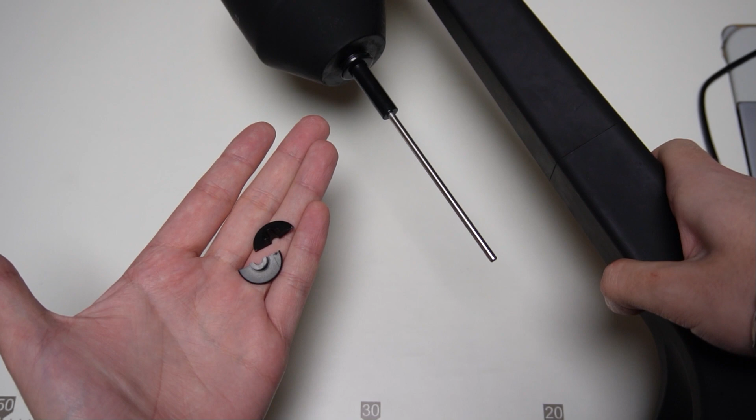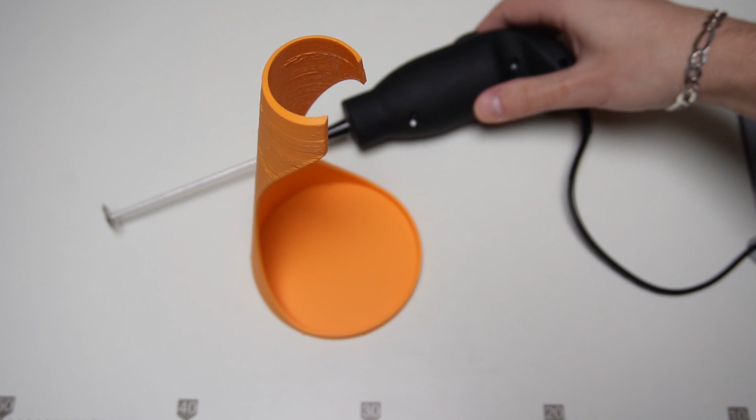The beater of my coffee mixer broke in half, so until I found the right filament to fix it, I bought a handheld electric one. But it needs a stand. I don't like the fact that it doesn't have a stand and I have to leave it on the table, so today I will show you how I designed this one in FreeCAD. I think it looks pretty good, or at least it gets the job done.

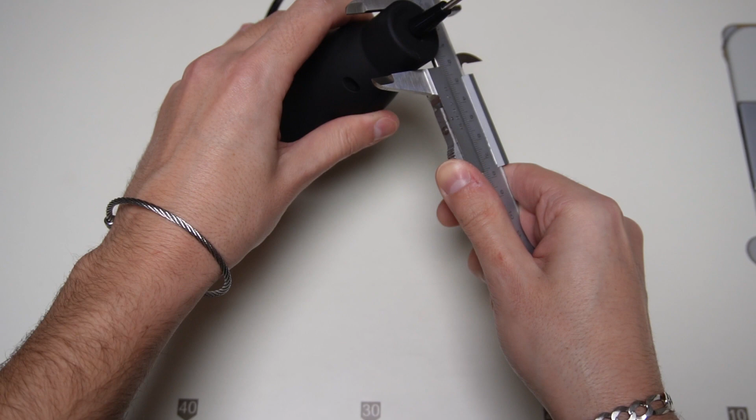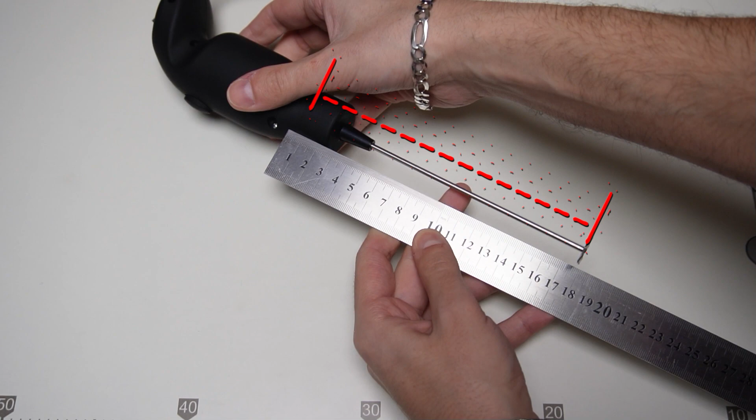I need to measure the mixer's diameter to make the top part of the stand the right size. In my case, the diameter of the mixer is 32 millimeters. The other thing I need to measure is the length. In my case, it is about 18 centimeters, so to make the stand I will set the height to 19 centimeters. I need to have at least 1 centimeter additional space so the beater doesn't touch the base of the stand.

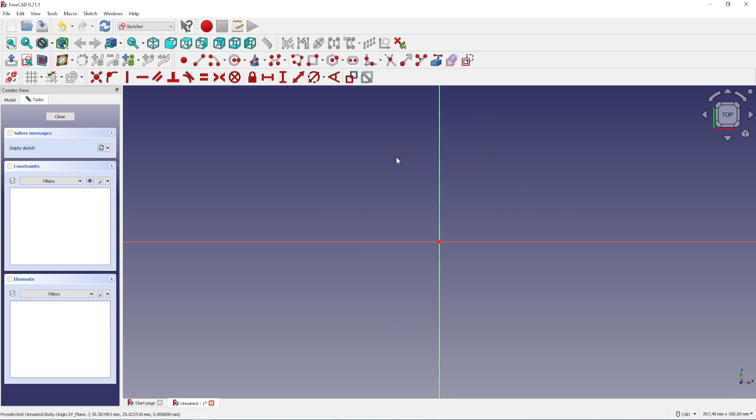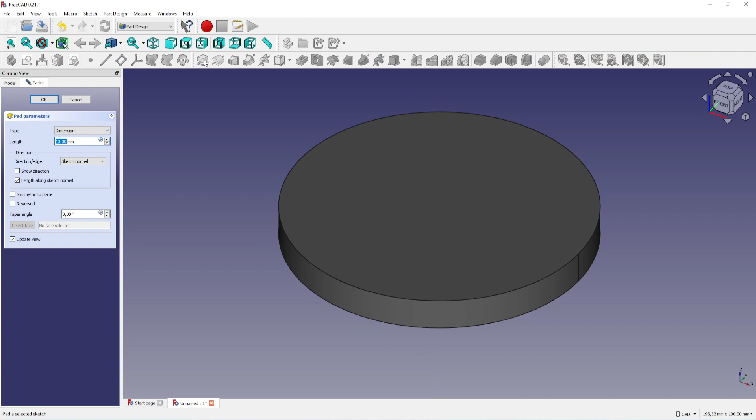Open FreeCAD, select Part Design Workbench and then create a new body and a new sketch. I will work on the XY plane. Start from the center point and draw a circle to make the base of the stand. My mixer is heavy, so I will set the diameter to 10 centimeters. Close the sketch and click on Pad. The length should be 10 millimeters. Click on the top face to select it.

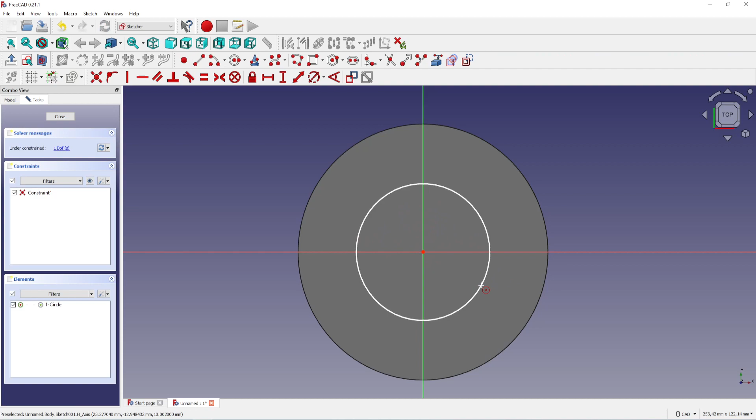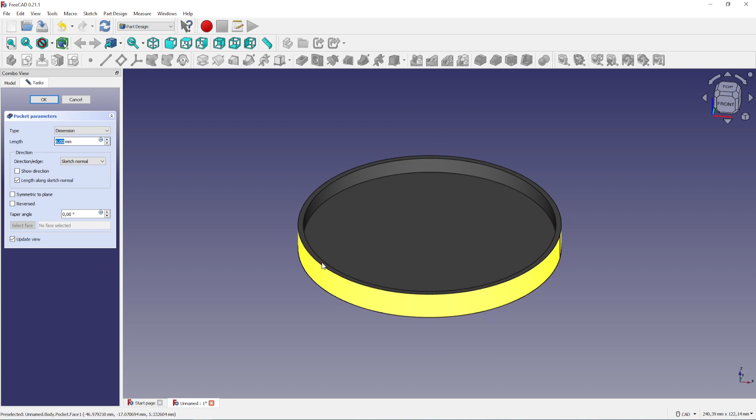Then make a new sketch. Draw a circle starting from the center point and set its diameter to 4 millimeters less than the diameter of the first one. Close the sketch and click on Pocket. I will make the pocket 6 millimeters. Click on OK.

Select the top face of the brim and create a new sketch. Draw a circle starting from the center point and make it the same diameter as the base. Now draw another circle starting from the center and make it 4 mm smaller than the other one.

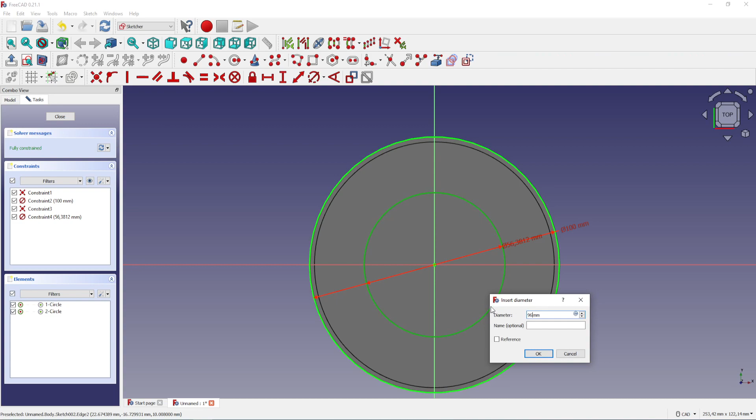Draw a horizontal line as shown in the video. Set the vertical distance between the leftmost point and the center point to 15 millimeters. Click on the leftmost point, then on the outer circle. Now constrain that point onto the circle. Then do the same on the other side.

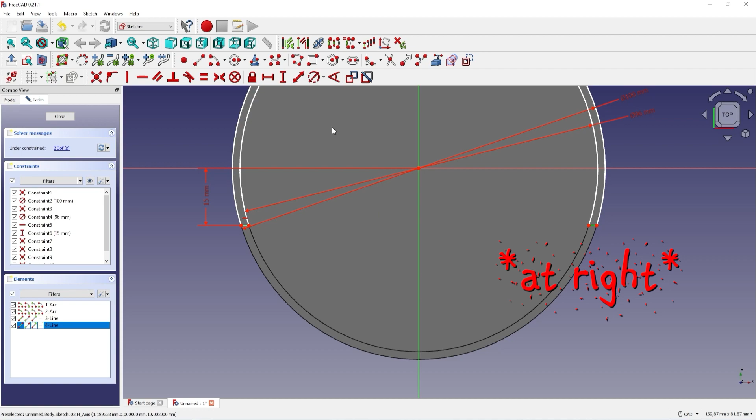Take the Trim Edge tool and remove the excess lines as shown in the video. Click on the small line at left and constrain it horizontally. Then set the vertical distance between the leftmost point and the center point to 15 millimeters. You basically only need to click on OK. Now close the sketch.

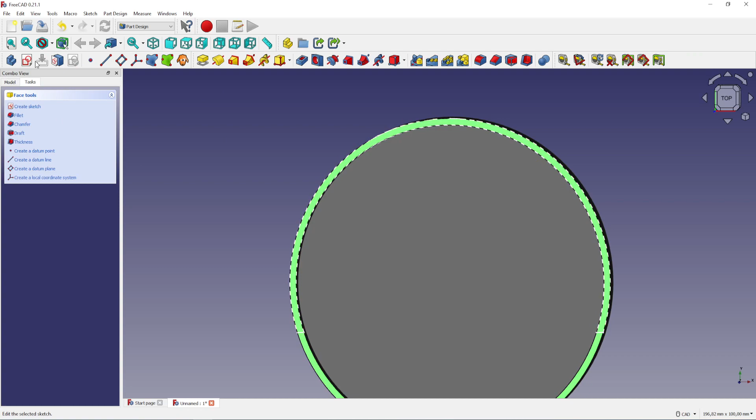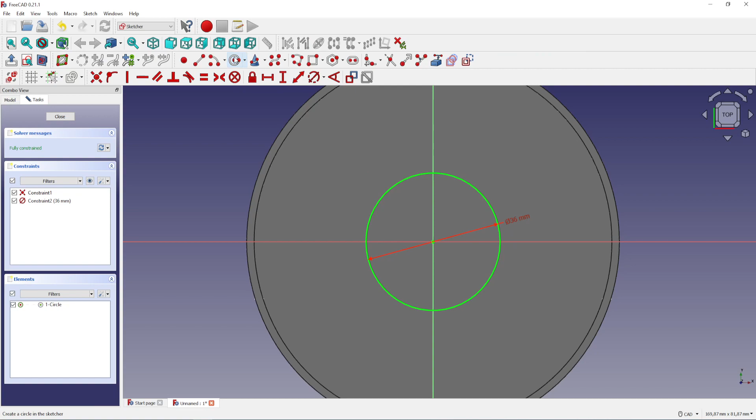Select the top face of the brim again and create a new sketch. Now draw a circle starting from the center point. Its diameter should be 4 mm bigger than the diameter of the mixer. In my case, this is 36 mm. Now draw another circle. Its diameter should be the same as the diameter of the mixer. In my case, this is 32 millimeters.

Now draw a horizontal line at the bottom. Select the leftmost point of the line and the center point, then set the vertical distance. I'm eyeballing it. We will need just a little opening so the beater of the mixer can be inserted, so you may set the dimensions as you wish. I guess 12 mm will work just fine.

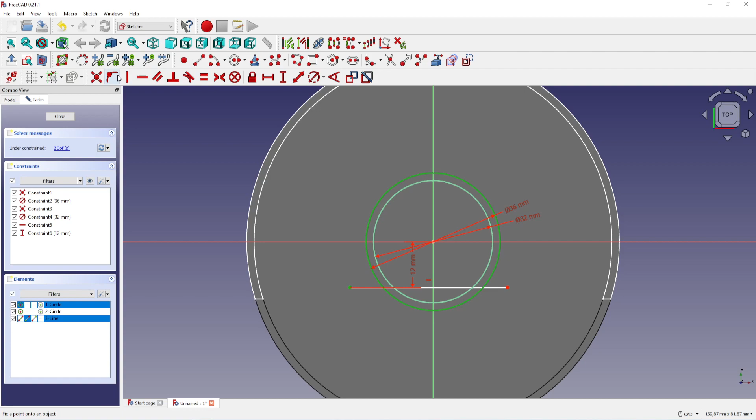Now select the leftmost point on the line and constrain it to the outer circle. Then do the same on the right side. Click on the Trim Edge tool and remove the excess lines as we've done earlier. Now constrain the small line horizontally and set the vertical distance between it and the center point.

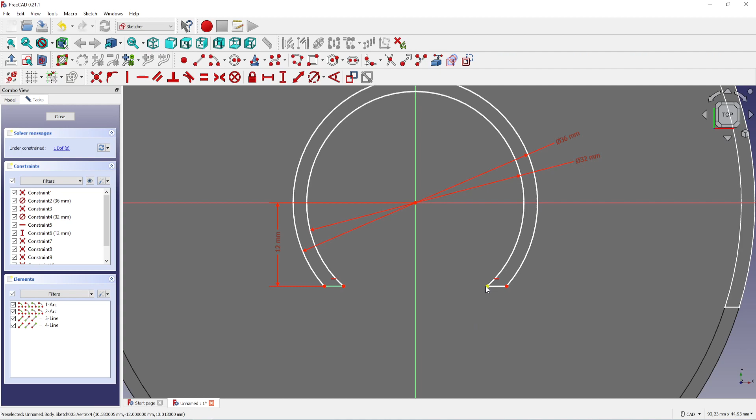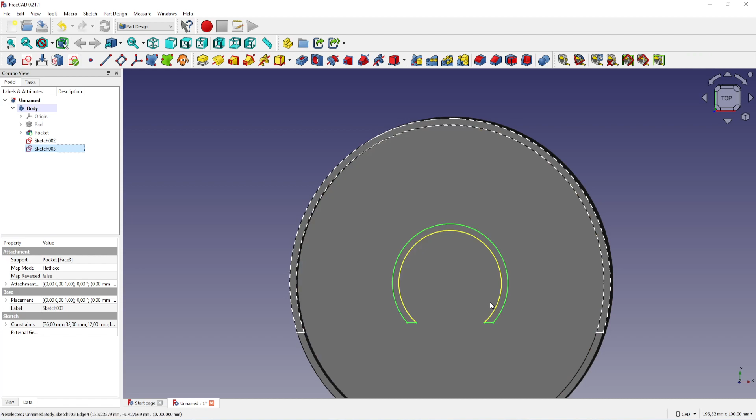We are almost done. You can close the sketch now. Click on the Model tab to see the tree view. Make sure Sketch003 is selected, then click on the attachment and on the button with the 3 dots.

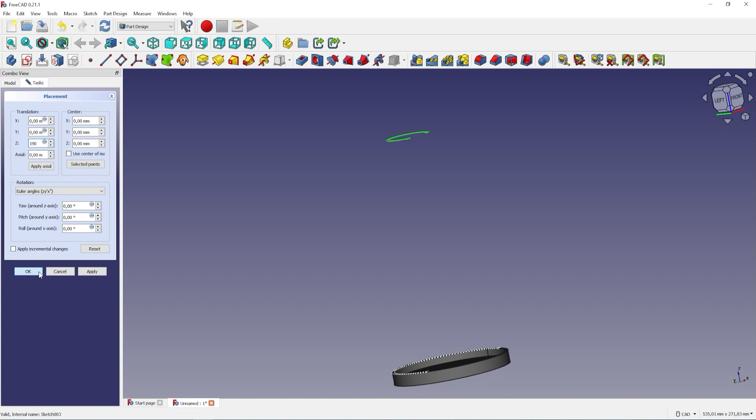In the Z cell you have to insert the length of the mixer that I measured in the beginning plus 1 or 2 cm extra. I will set it to 190 mm. Click on OK. It should look like this.

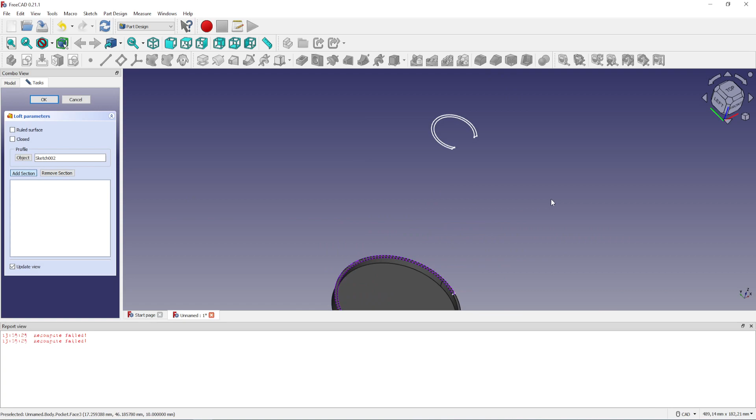Zoom in and select the outer line of the newly drawn sketch that is next to the base. Then click on the Additive Loft button. Select the same line again and click the Add Section button. Zoom out and select the outer edge of the other sketch. As you can see, our stand is almost ready.

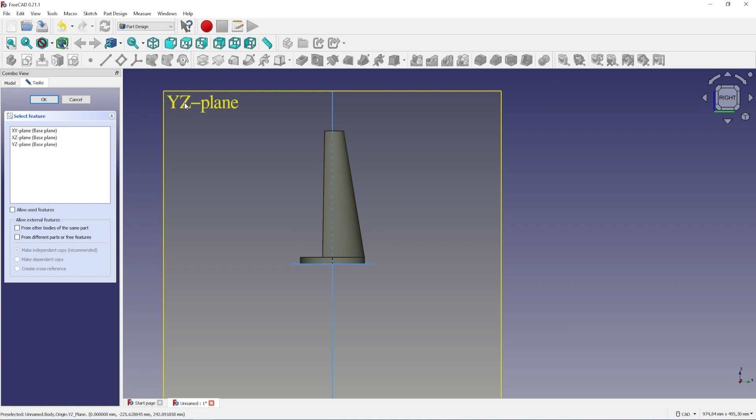Click on OK, then rotate the stand so the right side is visible. You can use the navigational cube in the right corner. Create a new sketch and select the YZ plane. Click on the View Section button to see half of the stand. It should look like this.

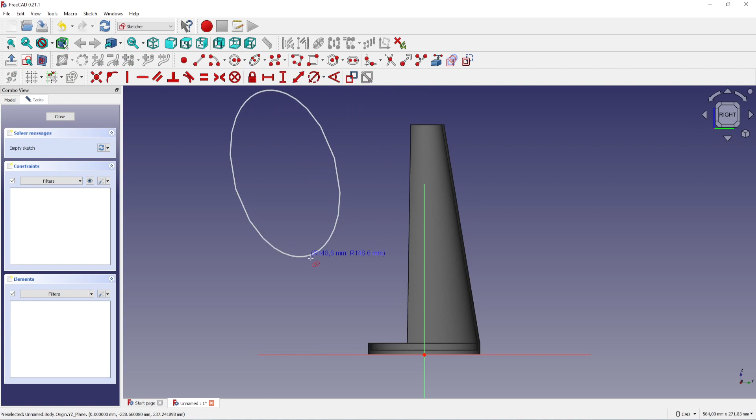Now click on the Ellipse button, choose the first one of them and draw it somewhere on the screen. We will use it to cut through the sides and make the stand look interesting. Align the bottom with the base of the sketch and make it as big as you want.

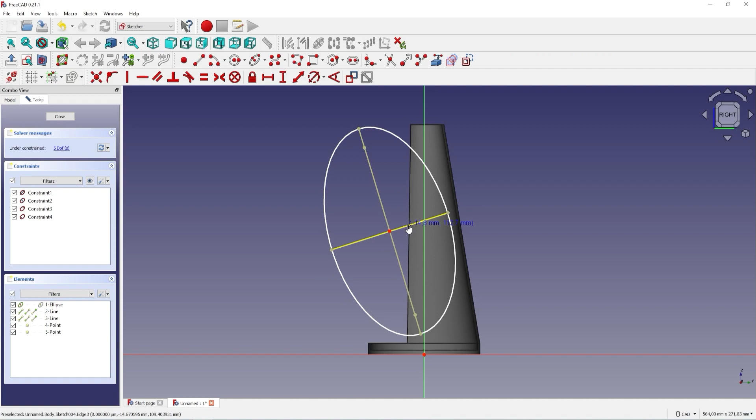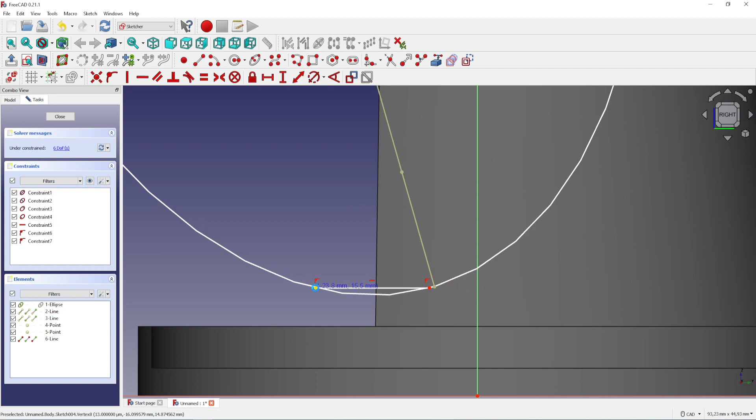When you find the right position, zoom in at the bottom. Draw a horizontal line somewhere on the screen and constrain both ends to the ellipse. Move it a bit until you are able to see the line. Then take the Trim Edge tool and remove the bottom line. The ellipse must have a flat bottom because otherwise it will cut through the base of the stand.

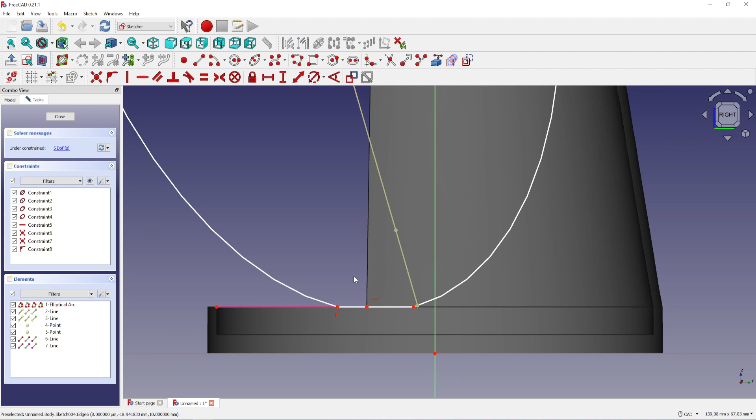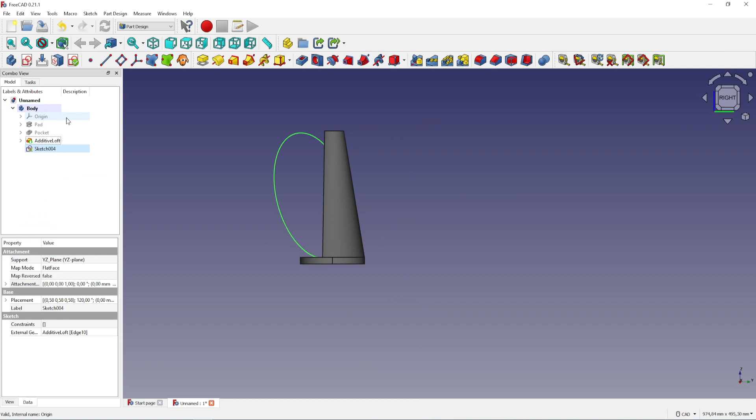Click on the External Geometry button and then on the edge of the base. Now constrain the ellipse to that line. At this step you may make more corrections to the size and the angle of the ellipse. We have 5 degrees of freedom, but I won't need that sketch to be fully constrained, so we can close it. Now it should look like this.

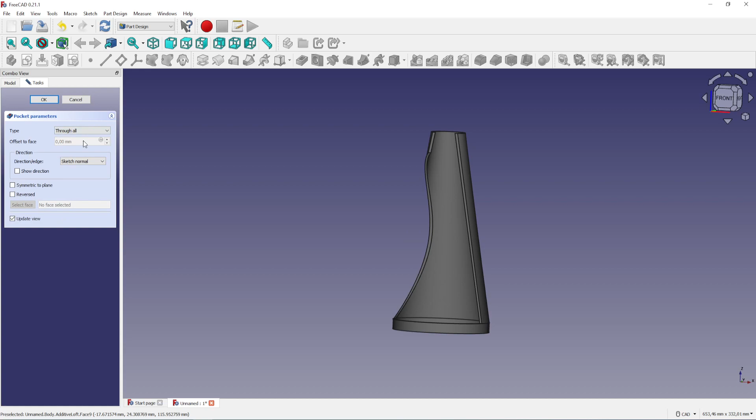We have to use this sketch to cut the sides. To do so, click on the Pocket button. Select Through All from the drop-down menu, then check the box Symmetric to Plane to cut the other half. The stand is almost ready. I will add one additional small detail. Click on OK, then zoom in a bit.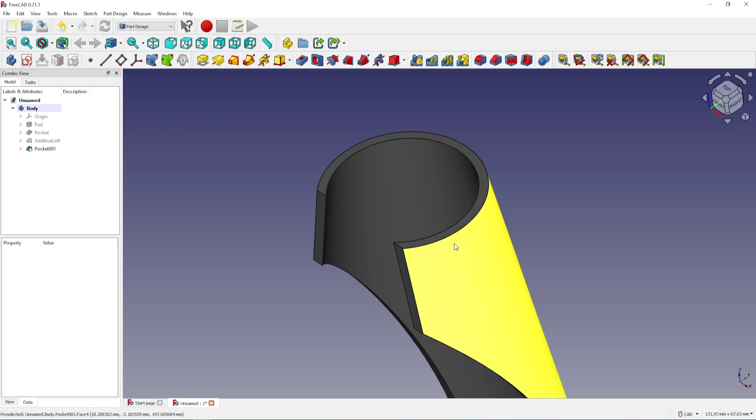Select the outer edge and click on the chamfer button. 2 mm is too much and 1 mm is not enough, so I will try to set the value to 1.8 mm. It looks pretty good to me.

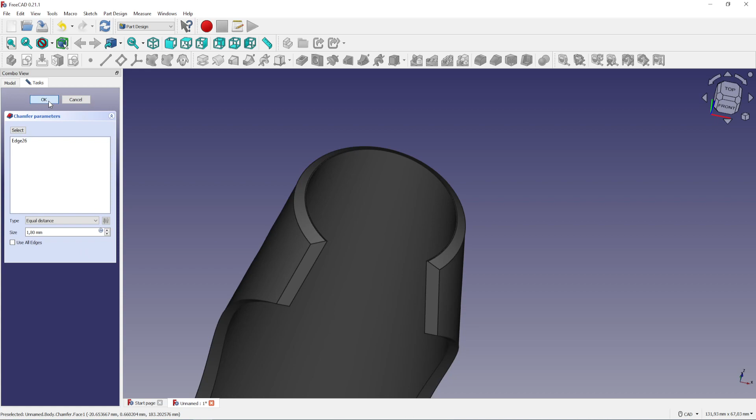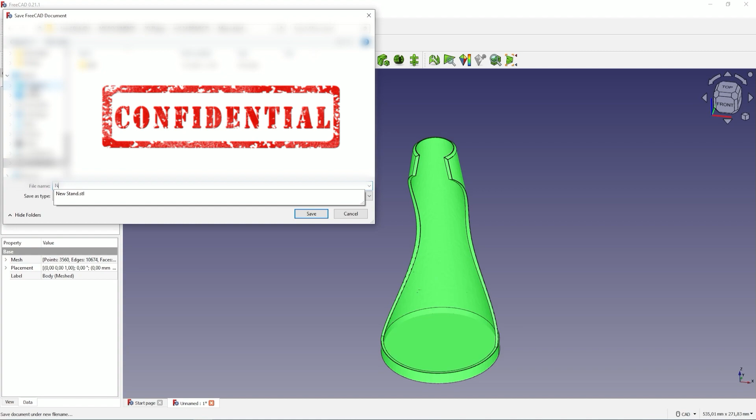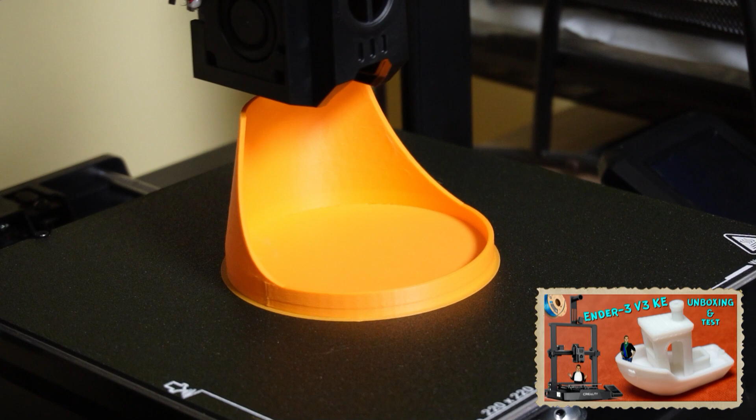Click on the body and select the mesh workbench. Now click on Create Mesh from Shape and then on OK. Right-click on the mesh and export it. Then save the project if further corrections are needed. I immediately sent the file to the printer. And as you already saw, this is what the stand looks like.